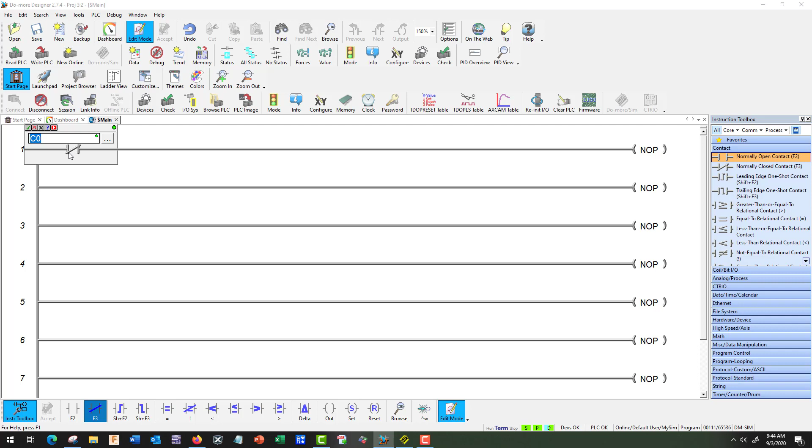And first thing I'm going to do is put in a normally closed contact. You see the contact and it's got a crossbar in it. That means normally closed, and it is going to be closed when there's no power. So it should be on until we turn it off by powering it.

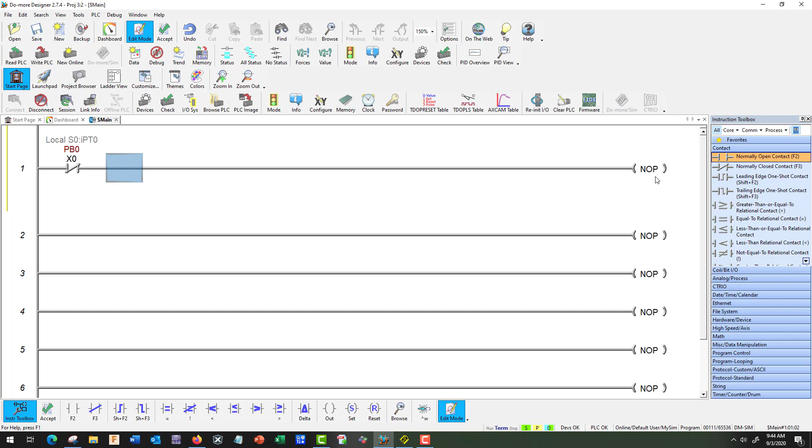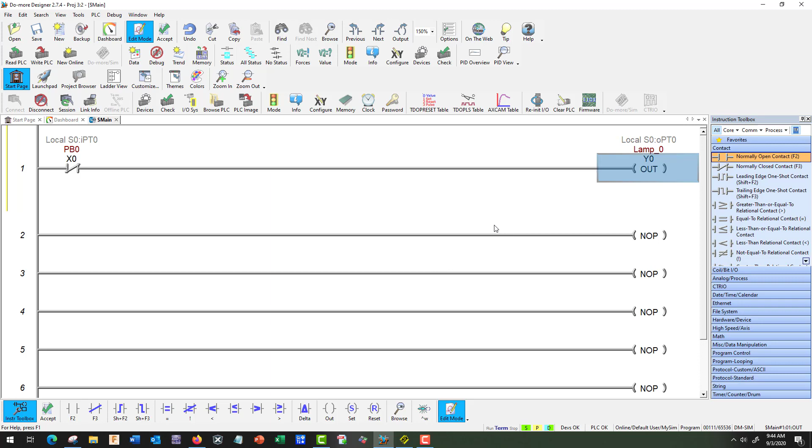So let's call this guy Y0, and we're going to call that lamp 0. Okay, so that's normally closed. So let's do a sealing circuit for a motor here. So let's do a start switch of X1. I'm going to call that PB1. Right, select, green check mark.

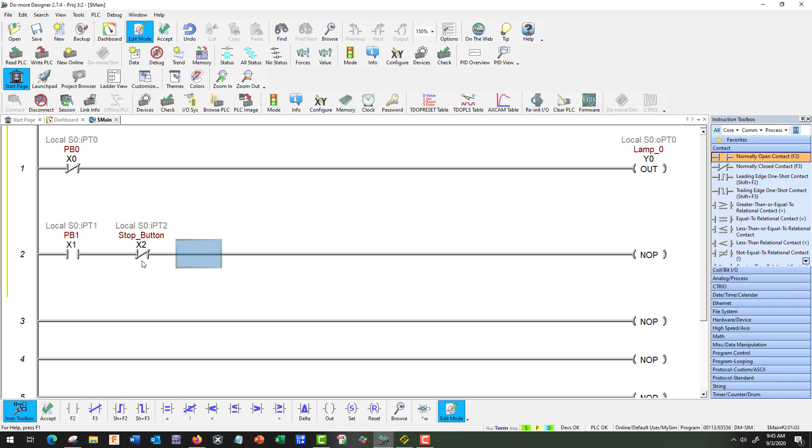Okay, so I'm going to use a closed contact. We're going to make that X2. And we're going to call that our stop button. Okay, that's going to be our stop button. So we're going to call this guy Y1. And I'm going to call it motor 1.

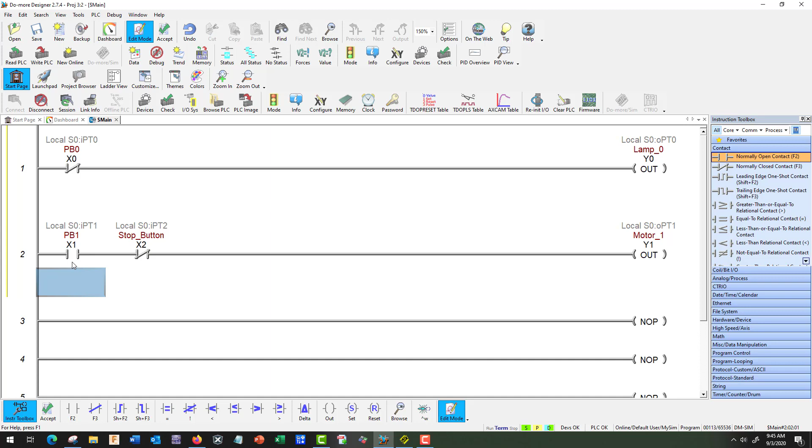Okay, so we have a motor starter here, so we need to seal around this relay and this contact because I want to push this, I want the motor to start, seal around it, and keep going until I push the stop button. So we're going to put another contact and we're going to call it Y1, and that's our sealing contact. And control up. Now I got a complete circuit.

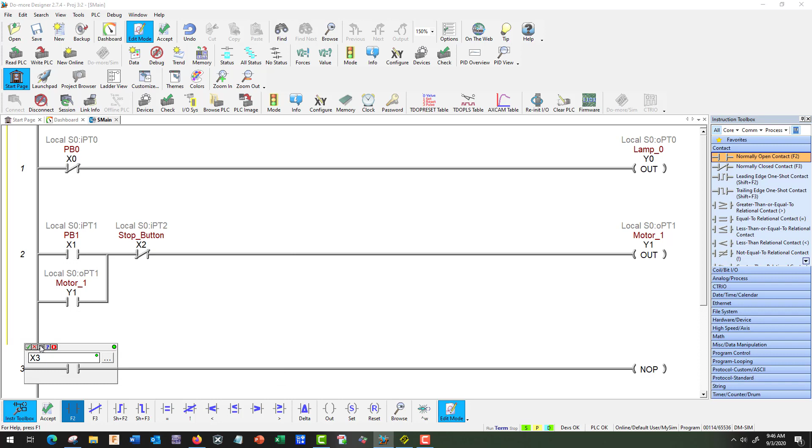Okay. Let's do another one here. This is a motor starter circuit with reset. Alrighty, so let's do a set. Let's see where we're at here. Let's call this guy X3. PB3. Right, select. And we're going to do a different function here. So we're going to go over our output here and we're going to select set. So sets are latching relays.

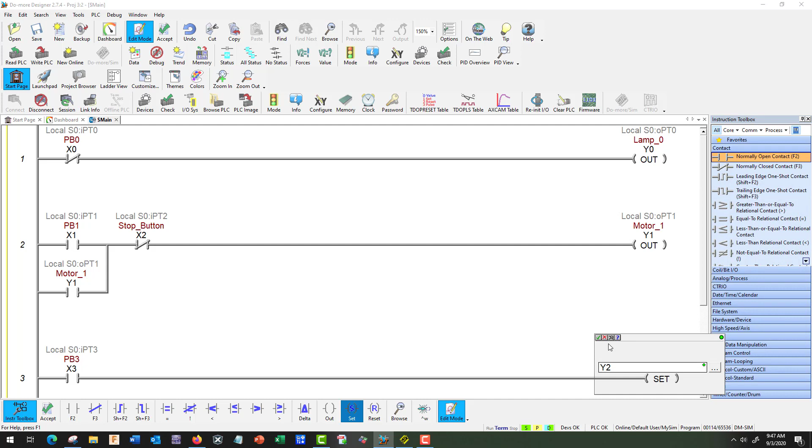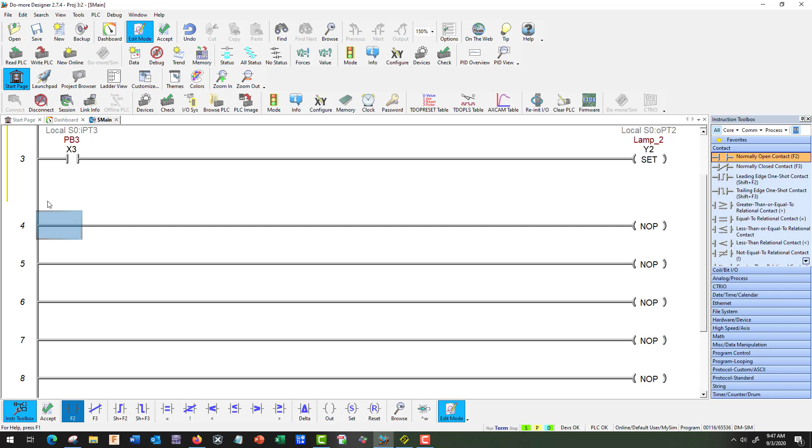Okay, so we're going to call that guy Y2. And let's just call that lamp 2. What the heck? Lamp 2. Right, select. Okay, and we're going to use PB4, X4. And we're going to use him to reset our lamp. So we're going to go over here and use R, reset. We're going to use the same contact. So this button's going to set the lamp. This button's going to be used to reset the lamp.

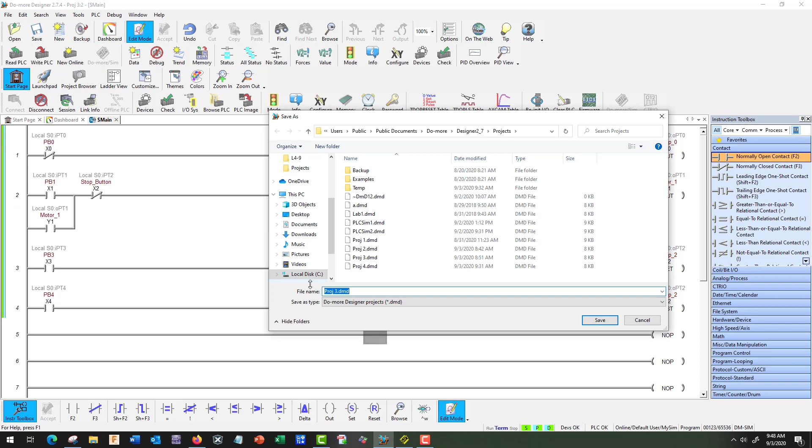Okay, so let's shrink it down a little bit so we can see everything. So let's accept. Let's save it. I'll call this project 5. Save. Alrighty, we want to be in the run mode. And we want our status. Oops, some way or another we didn't write to our PLC. How about that? Okay, no colored bars over here, that means that we're good.

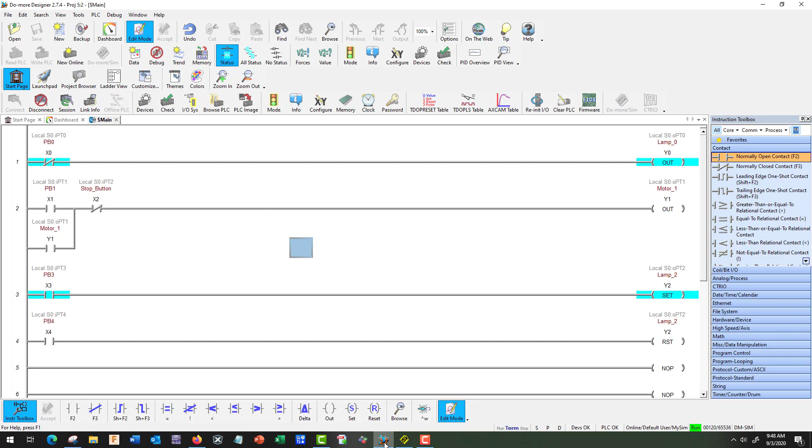Okay, so let's turn off X3. Looks like we got a couple of our buttons pressed. All right, let's start fresh. Alrighty, so here we have a normally closed contact, and our lamp's on. Okay, here X3, because it's pressed, so set will be locked. Okay, we'll clean that up here in a second. So, and our stop button is energized because it's normally closed. So let's do X0. When it's energized, it's off. When it's unenergized, it's on.

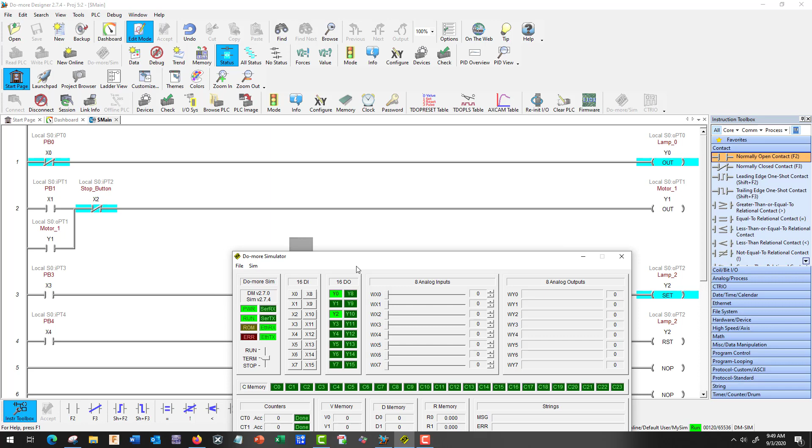Okay, so let's do our motor starter here. Let's do X1. Here's our start button. The motor runs, seals this contact, seals around this push button switch. So now that I release it, the motor's still on. Okay, if I want to turn it off, I'm going to push the stop button. Okay, and the motor's off. That's a motor starter sealing circuit.

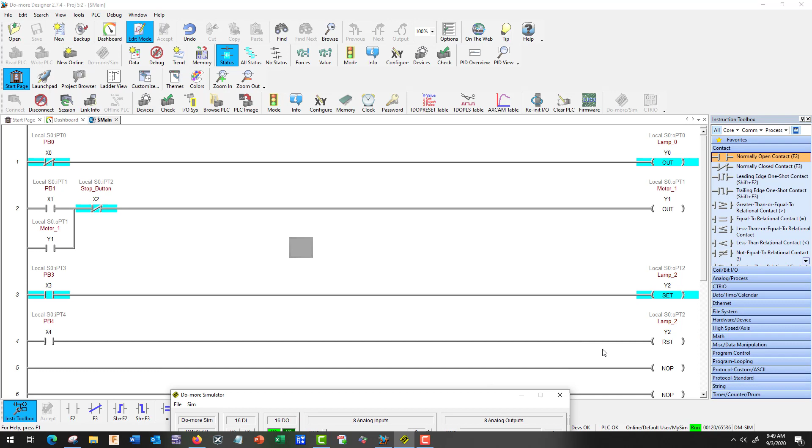Okay, so let's do a reset here. X4, clear it. Okay, so now we have a reset. Our lamp's off. So let's go ahead and do a set. X3, we have set and our lamp is on. And that's enough for today.